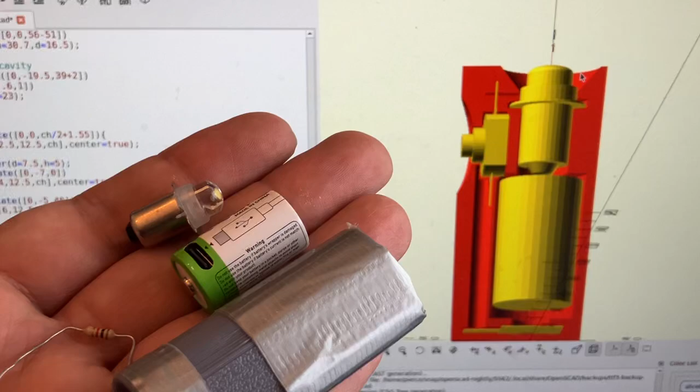Welcome to Tooltech Geek. This is a flashlight that I designed, the enclosure.

These are some parts you can get from Amazon, such as a LED light bulb, a little spring contact, a switch, an on-off switch, and a resistor.

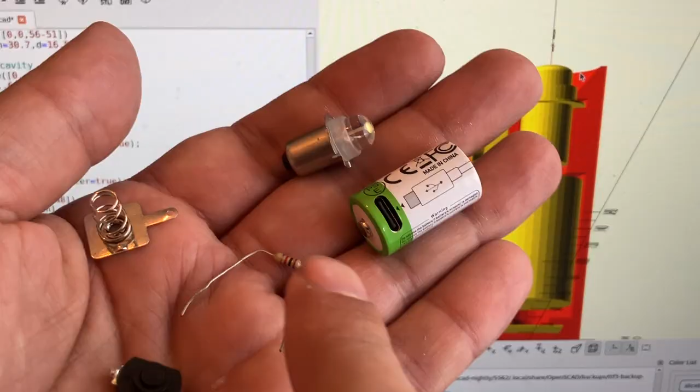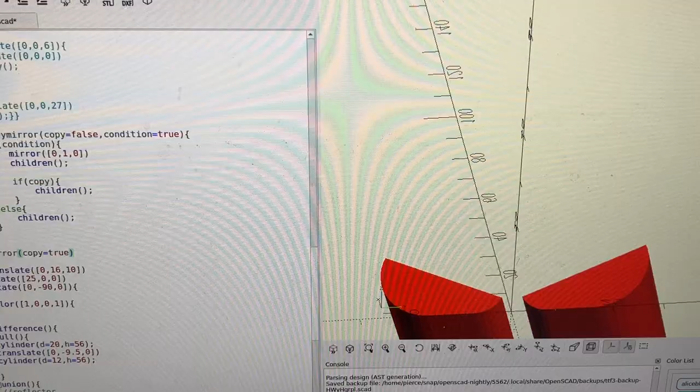So I basically modeled some of these parts in this CAD, OpenSCAD, and created this enclosure all around it, and then I divided it, basically mirrored it, so one can print it in a 3D printer. This looks very much like an industrial part, so I printed it this way.

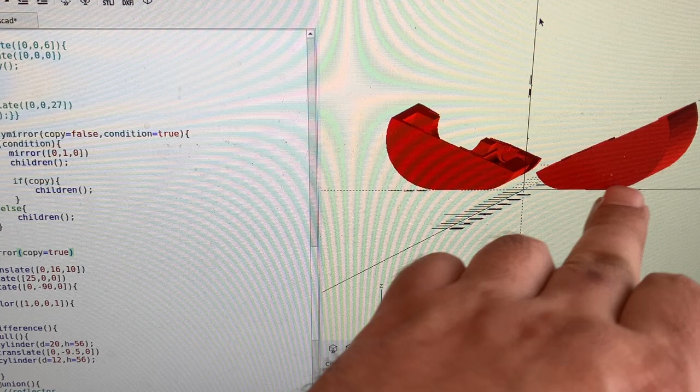It has to be flat on the bottom, so I added a bit of support because here this angle is pretty steep. So I printed these two halves and I put the components inside with some soldering.

I just duct taped the thing because I didn't do any sort of fastening or way to hold it together. But as a proof of concept, it's pretty good.

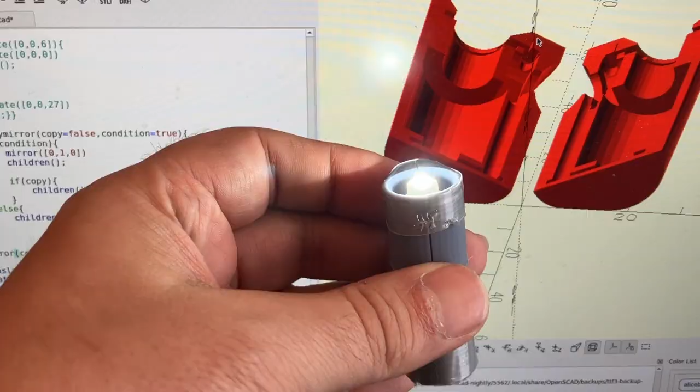What's the point of making your own flashlight? Well, one idea is you can integrate it with other things, so you can make maybe some kind of multi-tool that includes a light. So it could be interesting. The other is just for fun.

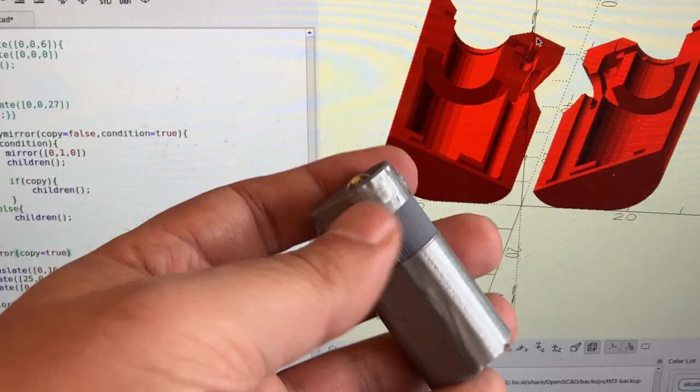Or you could make a light that has the specific lumens that you want or something. In any case, my case is kind of to investigate how to make a design that is very small.

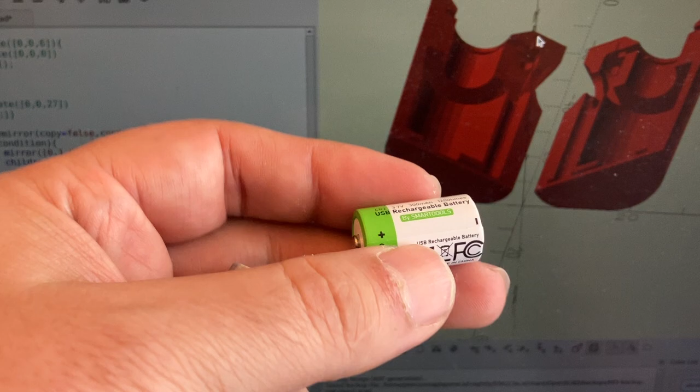It uses the CR2 battery, which is very lightweight. You can get a rechargeable and non-rechargeable version. These are rechargeable, CR2, 3.7 volts.

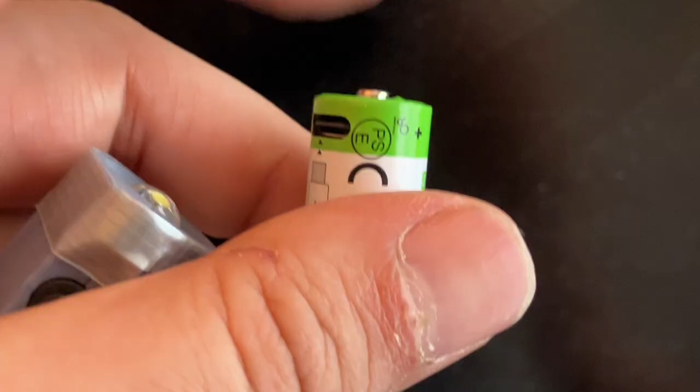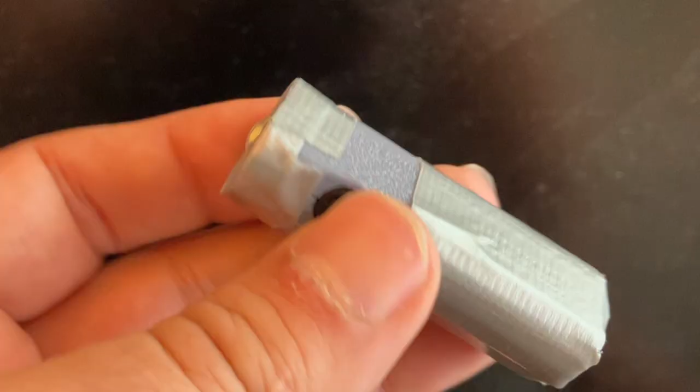The only problem is one of these was dead on arrival. Same thing happened with the light bulb - one works, I ordered two, one works, one doesn't. So with some of these very cheap components, probably your best bet is to order several in case some are bad quality control.

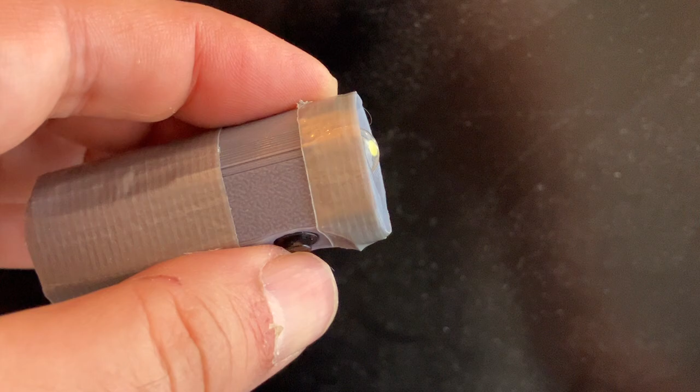And this is all kind of for prototyping, so I don't care too much. But if this was more serious, I'd be complaining, returning, because it's very hit or miss with some of these products.

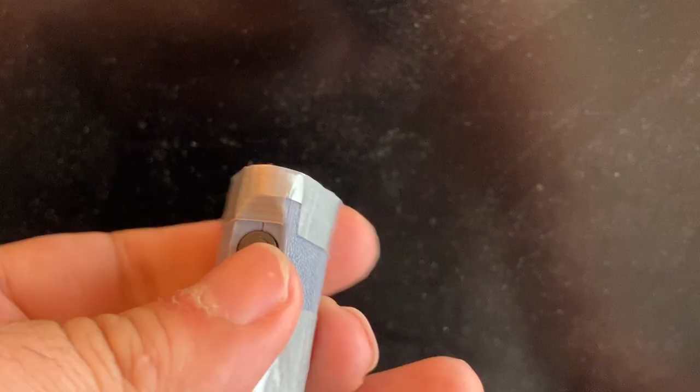So all in all, this kind of shows you can build your own flashlight. It's not very efficient because I reduce the current using a resistor, which basically wastes some of the energy instead of producing light. However, by reducing the current, this battery may last longer and not be discharged too fast.

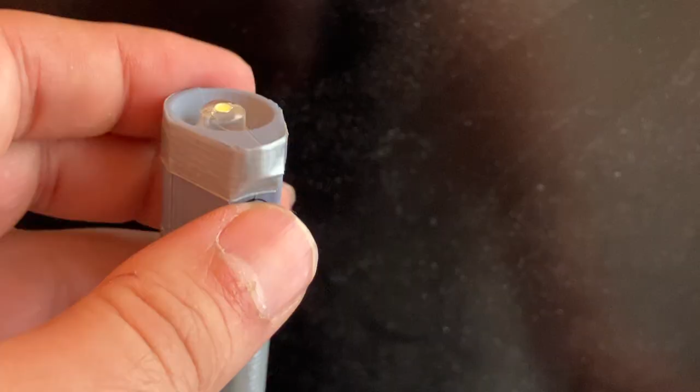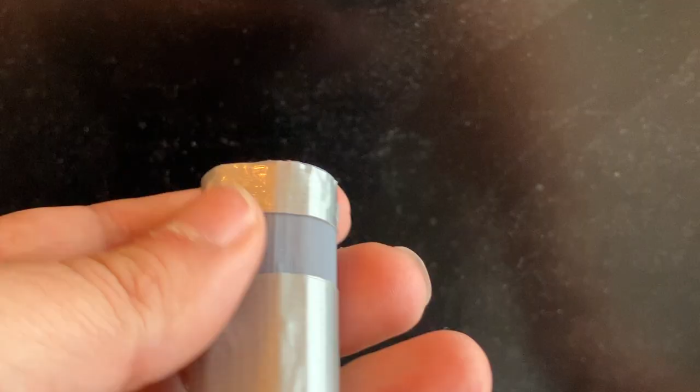So you could connect the battery directly to this light bulb, but it's going to start to heat up. It produces a lot of light, but it heats up, and when the bulb heats up, then it reduces the efficiency, so that's also bad.

So I know this is a little light, kind of an EDC type of size. This design will probably have to be improved by having ways to open it and change the battery very easily without messing up the other components.

I may or may not do it, but so far I kind of like the whole process of making something from scratch. Thank you for watching.